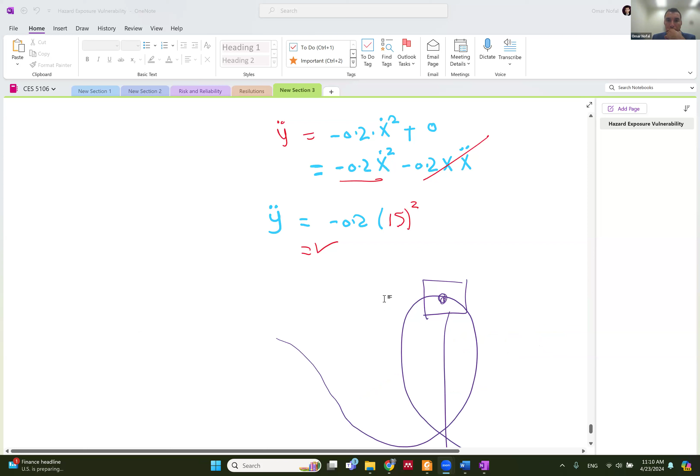Like, for example, if in the problem you are given a body that is moving from here to here, and I give you that this body covered this distance s equal to 6 meters in time 5 seconds, find the velocity, find the acceleration, find all these, that means that's chapter 12. It's kinematics. It might be given in different ways.

I might give you the velocity it started with, and I don't give the distance, and I tell you that it stopped here. So I'm just playing with different problems, but it's the same concept. Look at the equation sheet. You will find the general rules. You will find the ones with constant acceleration and non-constant acceleration. You have to distinguish between these. You need to understand the problem, understand the givens, and substitute in the equations.

In a problem where, for example, I tell you a body is on a slope, and there is friction with mu k equal to something, and this body has a mass of 10 kilograms, so you have to convert it to weight, and it's attached, for example, to a spring or a force that is pulling this body. So once we start talking springs, forces, and I give you weights, that means we have to use Newtonian kinetics. So I have to draw a free body diagram and a kinetic diagram and substitute with the sum of the forces equal to ma.

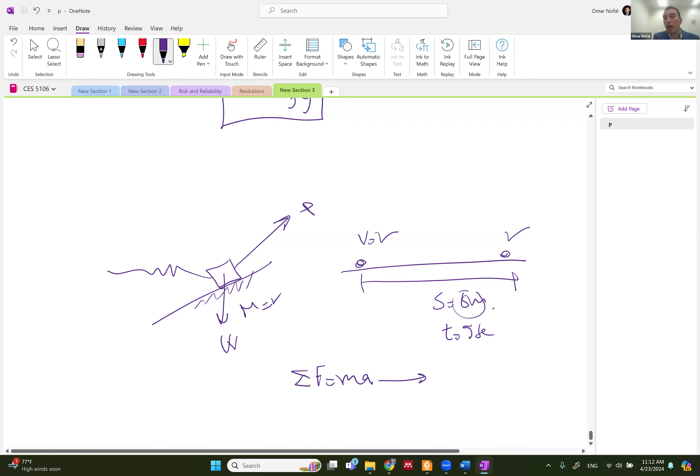This can be, for example, linear, so you will talk about x and y. It can be tangent and normal, so we will have to figure out the tangent and normal components. It can be r and theta, which is polar. That means the body is moving in a circle. So you will have to get sum Fx, sum Fy, or tangent and normal, r and theta, and you have all the rules for these. Like how to calculate a normal, which is v squared over rho. So you have to understand what is given in the problem.

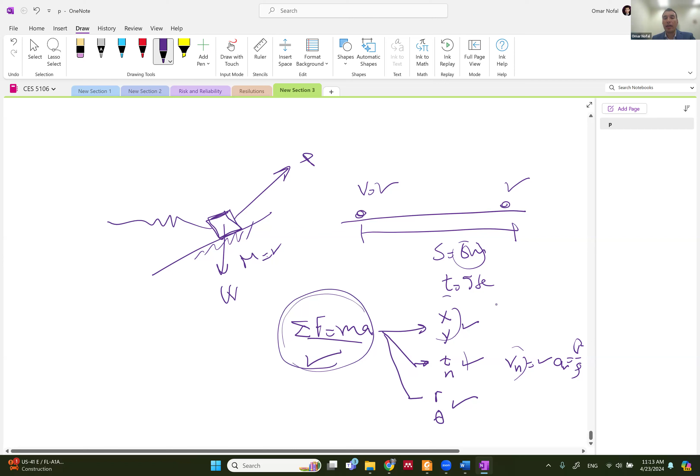Sometimes problems can be solved with chapter 13, the Newtonian kinetics, and also can be solved with work and energy in chapter 14. It's kind of the same thing. If we are solving a problem at a specific instant, like this instant, that means I can apply Newton's second law. Newton's second law is applied at a specific instant, not over time. But work and energy is about bodies that start at a specific position and end at the final position. So that's when I give you specific positions, like position 1 and position 2.

And then I give you, for example, the distance s that this body traveled, and a force acting on this body. So that means I have force over distance, so I need to use work and energy. Maybe I use conservation of energy. So you will have to understand which one to use. Sometimes I give you two positions, but I ask you to calculate something at one instant. I give you the other position just to calculate maybe the velocity here, or the acceleration of the body here, so you don't have to use work and energy, just apply Newton's second law at this position. Like the one I gave in the first midterm.

I gave you a curved circle like this, and a body moving here, and it came here, but I don't want anything from this position. All I wanted was this position. In this position, you draw a free body diagram. The weight is going down, the normal force is going up. This is the free body diagram, and the kinetic diagram. You will have the a normal this way, the a tangent this way, and then you sum the forces in the tangent direction and sum the forces in the normal direction. Depends if there's friction here or something.

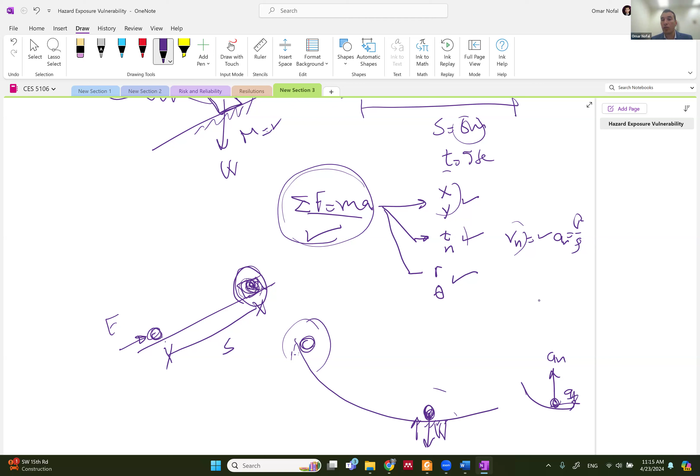So my advice, in any problem you will have to draw something. That's what I do in any engineering problem. Most of the problems in dynamics require you to draw a free body diagram and kinetic diagram because bodies are moving. So you will have, for example, a body moving on a slope like this. You will have to put all the forces in the free body diagram. For example, this body has an external force P pulling this way. If it has a spring like this, you will have to put the spring force Fs.

You will have to put it if there is a friction. So if this is the free body diagram, this is the kinetic diagram. If there is a friction, and I assume that this body is going up, so this is MAX and this is MAY. So if the body is moving up, and this is my assumption, I have to assume the F of friction is going this way, and I have to assume the normal is going up.

I put all the forces in the free body diagram and all the movement, the acceleration, AX and AY, in the kinetic diagram. And then all I have to do: sum of the forces in the X direction is equal to MAX, sum of the forces in the Y direction equal to MAY. So I have a bunch of forces in the X direction. I have F of friction.

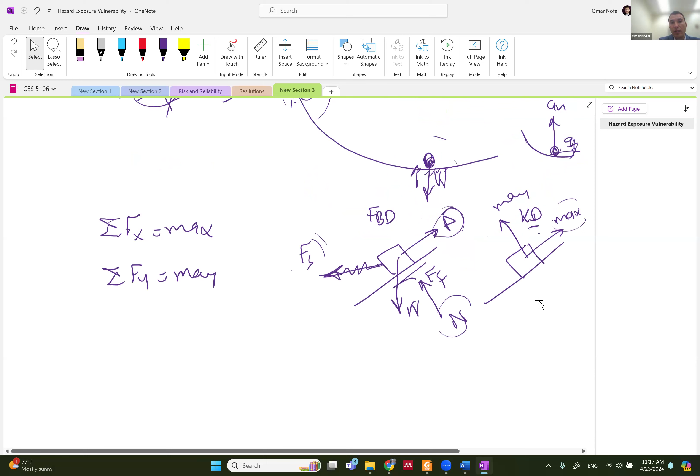So yeah, Newton's second law is applied at the specific instant, either at the initial position or at the final position. However, work and energy works between two different positions. Like this one, it's only one position. I can apply Newton's second law at this position or at this position or at both of them. But when I tell you a body started moving from this position and moved on a curve and came to this position.

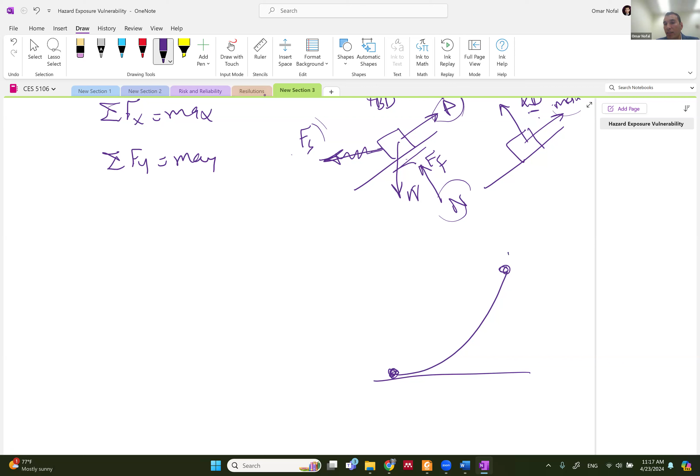So right now I give you some information to get the velocity V2 and V1, and I give you the information about the height here and the height here, H2 and H1, and there's a force applying on this body. So I have to know the path of this force, so I have to know the S on this curve. So right now you need to apply that the energy at position 1 is equal to the energy at position 2. And the energy means that the kinetic energy T1 plus V1 plus the work done by the external force from 1 to 2 is equal to T2 plus V2.

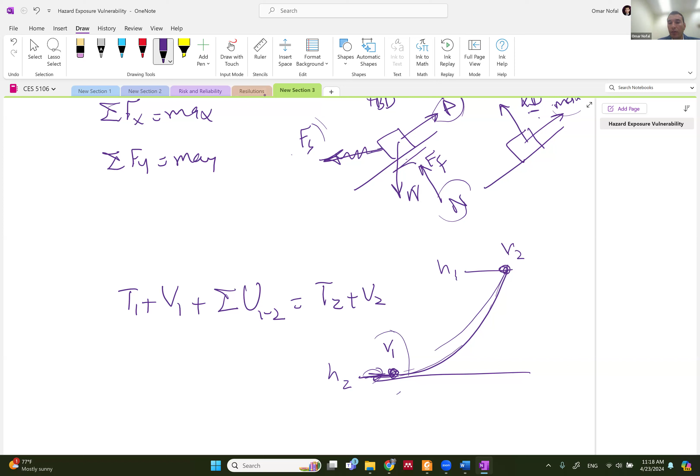So right now you have two positions, and I need to deal with these two positions. I need to know all the information about this position. So if I said that this is the datum, so this is H2 and this is H1. So H1 is equal to 0. So definitely V1, the potential energy, is equal to 0, unless there's a spring. So I'm gonna add the potential energy that comes from the spring. This has H2, so I have to do the potential energy.

If V1 has a value, and I'm telling you that I shoot, for example, a soccer ball, and the soccer ball went on a curve like this until it stopped here, so V2 is equal to 0. That means that the kinetic energy half mv2 squared is equal to 0. So you have to write all the rules because you will get points on the rules that you write. If it's a problem where you use the conservation of energy, you have to write this rule and then expand this rule.

So you know that the kinetic energy is half mv1 squared. I know that the potential energy has two components: one comes from a spring, one comes from the weight. So the weight is mgh1 and the spring is half ks1 squared, plus the work from 1 to 2. And this is equal to half mv2 squared plus mgh2 plus half ks2 squared. So I expanded this rule.

The next thing is to substitute. So if you have V1, you substitute V1 here. If H1 is 0, and that depends on where you decide the datum is. I decide the datum here. If you decide the datum up there, this is gonna be your datum, and any distance below the datum is gonna be negative. Any distance above the datum is gonna be positive. So I have mgh1; if there is no spring, these two are gonna be 0. I have H2, and V2 is equal to 0 because I said that the body's gonna stop here.

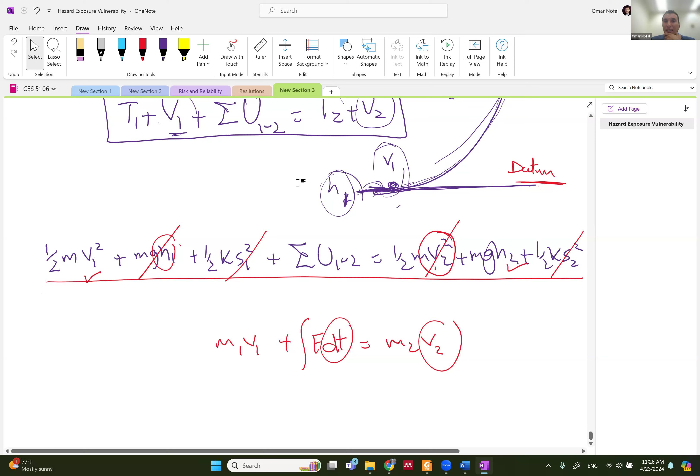And we don't need that because each problem is going to have like 20 to 25 minutes to solve, and you need to allocate your time in an efficient way so that you can tackle all the problems. So I believe that's my best strategy. To solve an exam, you need to read the problem very well, identify what approach you are going to use, and based on the approach, look at the equation sheet, see what equations you have and how you can use them to solve the problems.

Yep. So do any of you have any questions so far? Is this any helpful?

Sorry, Professor. I think someone in the chat asked if there's gonna be a pulley question, I guess related to rigid body motion or something similar. Well, it can be. You already got a quiz on this. You have to understand, actually pulley questions are easy, not that difficult. It's just a bunch of lengths that you have to calculate. So you need to understand how the system works.

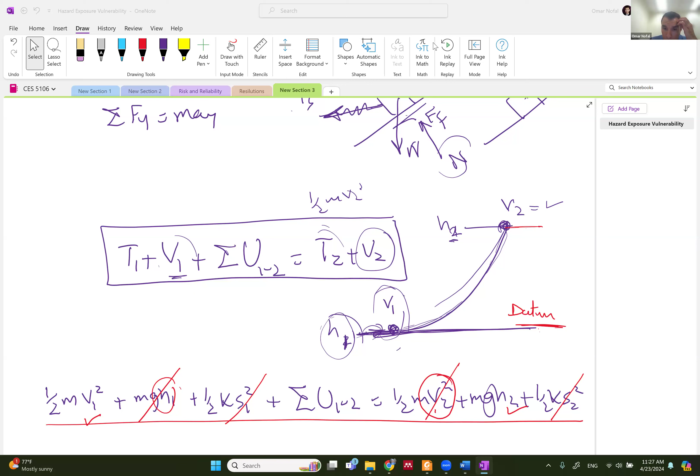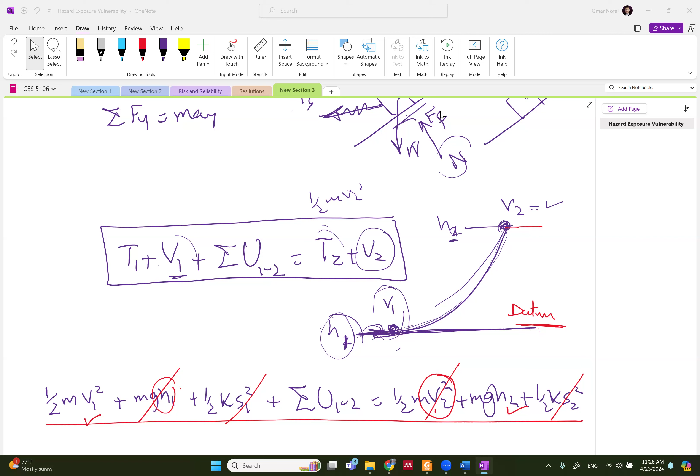Professor, I have a question. Do you have an example for the rigid body motion, the relative motion? Because that's the one that sometimes makes me confused, not with the omega, but when the omega has to do with a fixed point. Yeah, I got you. So basically when the velocity has to go one way or another, to get the right k, the right i and stuff like that.

Yeah, so let me look here for something. Forget my folder. Let me actually check if I have something that I can copy and paste here. Maybe a question from the homework.

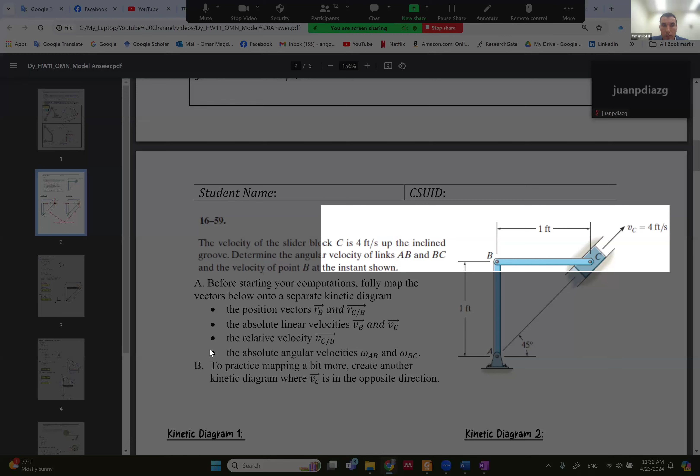Right, so let's pick this problem. All right. Okay, so let's see this problem. It says that you have this system, the velocity of the slider block C is 4 feet per second and it's going up. So it shows you the direction of VC. And here you want to distinguish between the absolute velocity and the relative velocity.

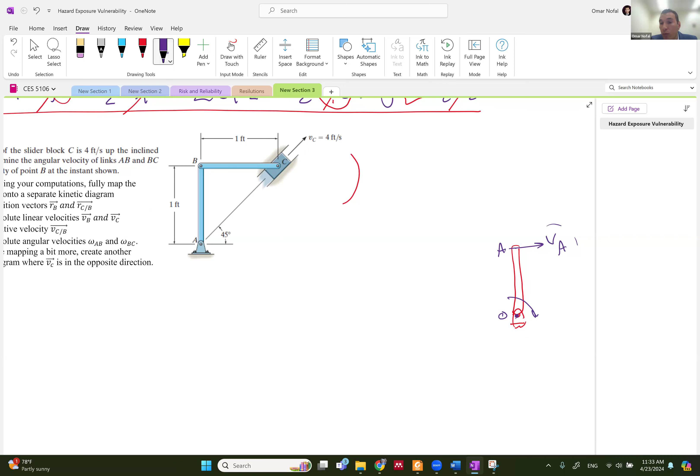So the absolute velocity, for example, let's write this here. If you have a bar like this, and this bar is attached to something here. This is the origin, O, and if this bar has omega this way, this is OA, this is VA, and this VA is with respect to a fixed location O, because O doesn't move. We said that VA is equal to VO plus VA with respect to O.

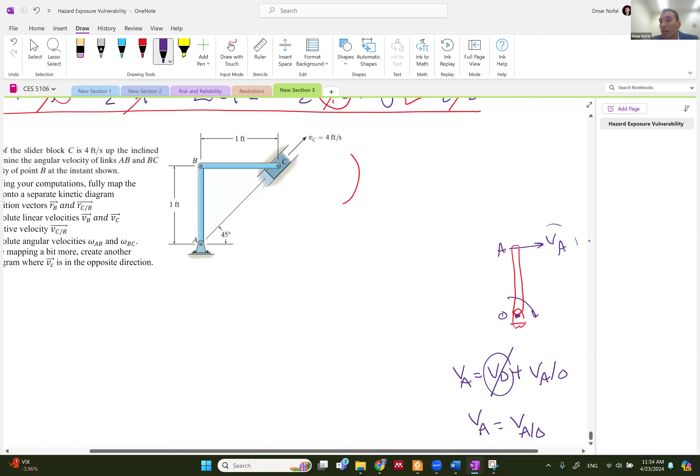So VA is equal to VA with respect to O. Why? Because VO is equal to 0. O is not moving. So that's not relative velocity. That's called absolute velocity because VA with respect to O is the same velocity as VA. Okay.

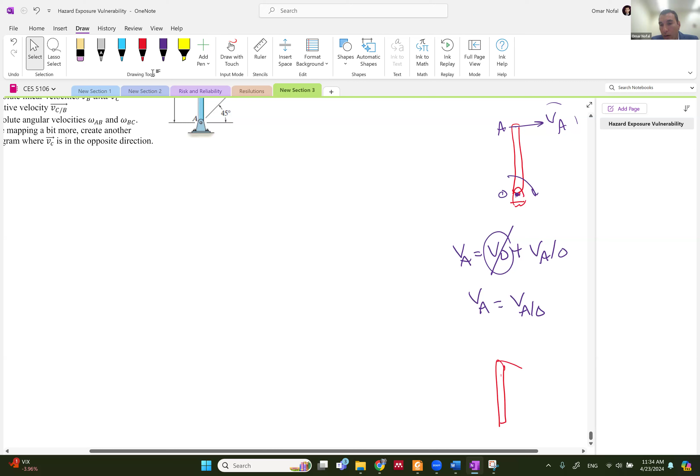But this is not the case if you have something like this, and then you have your bar like this, and this bar is attached to something like this. So this is fixed, and this is fixed. Let's say that this is A, B, C, D. Let's see what is absolute and what is relative. VD is equal to 0 because this is a fixed axis and VA is equal to 0.

If we want to get the absolute velocity, and I'm saying that this is moving with omega in this direction. By the way, you have to understand when omega is negative and when omega is positive. Omega is positive if it's counterclockwise and the thumb is towards me. But it's negative if it's inside your paper or inside your screen. So that's negative if it's clockwise.

So I have clockwise omega, which is negative, which is going to give me a VB in this direction. So this is VB, and this is absolute velocity. Same thing with VC. If this is moving this way, this is going to be moving this way. VC is going down. That's also absolute velocity. Both VB and VC are absolute velocities. Why? Because they are with respect to D, which is not a moving point and has a velocity equal to 0. So the absolute velocity is going to be equal to the relative velocity.

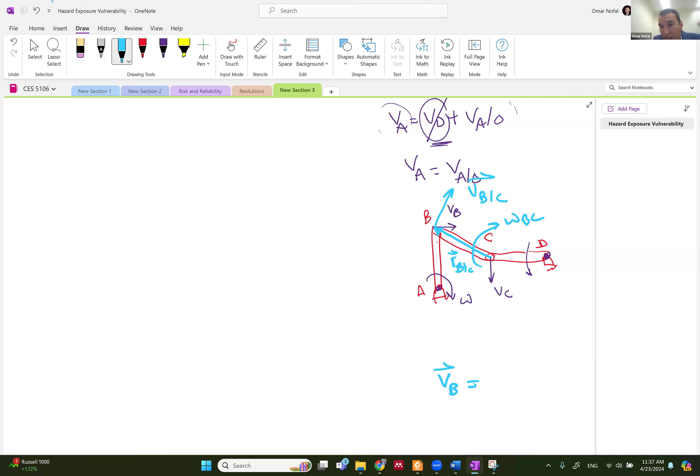If we want to find, for example, the VB vector, VB vector is equal to VC vector plus VB with respect to C. For example, in this problem I might give you this distance, this R, and I give you this omega. If you know this R and this omega, you can get the absolute velocity VC by multiplying R by omega.

If you have a bar like this, and I give you the omega of this bar, and I want this velocity, you multiply the R by omega. If you wanted the velocity here, you multiply this R by omega. The velocity keeps decreasing until you come here, and this is the point of zero velocity, which is the instantaneous center of zero velocity.

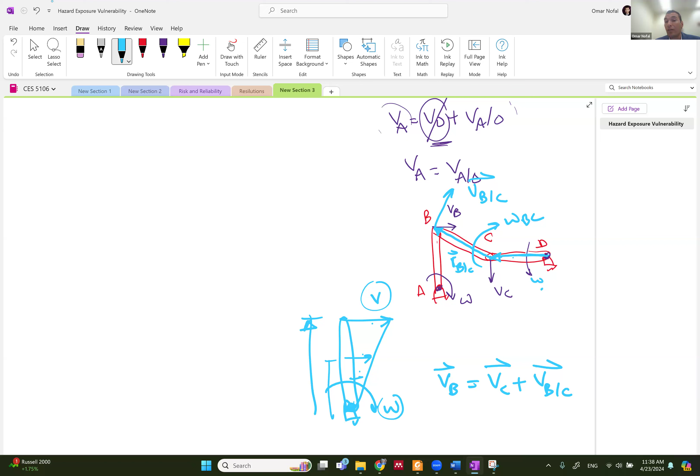So if I want to get VC, I get it from the omega here and R here. So I know this. Then I want to find what is VBC. VBC is going to be equal to the omega... which one comes first? I believe if you look at the equation sheet, it's going to be R BC cross product omega BC. Is that right?

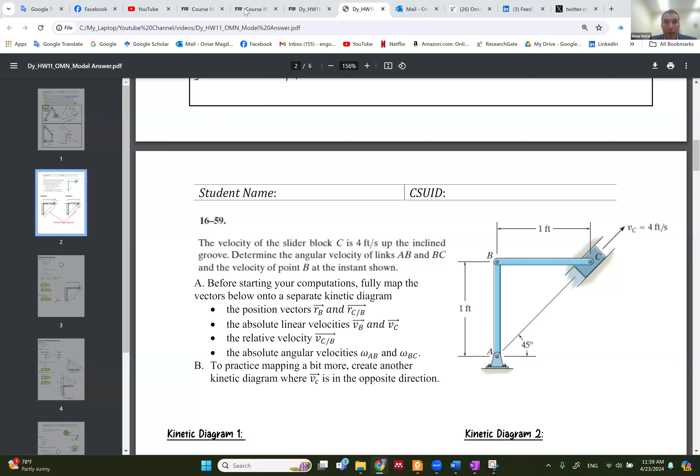If we go down, I believe I have it many ways. Okay, I have actually omega before R, and this is going to be a huge difference because it's going to give you a negative. So I have to have omega multiplied by the R vector. Let's swap these.

So you will have omega BC crossed by R BC. How can I get R BC? You're definitely going to be getting a distance like this and a distance like this. So you get R BC as I and J, and omega somehow, maybe it's unknown, maybe it's given, maybe you keep it as it is.

But let me tell you something. If you have a vector equation like VB equal to VC plus VB with respect to C, this equation has an I component and has a J component. So from this equation, you can get two equations.

You know the direction of VB. I know it's all in the I direction, so I know that VB has a magnitude VB in the I hat direction. And VC, I know that has a magnitude VC in the negative J hat direction. All goes down. All this information, that's basics.

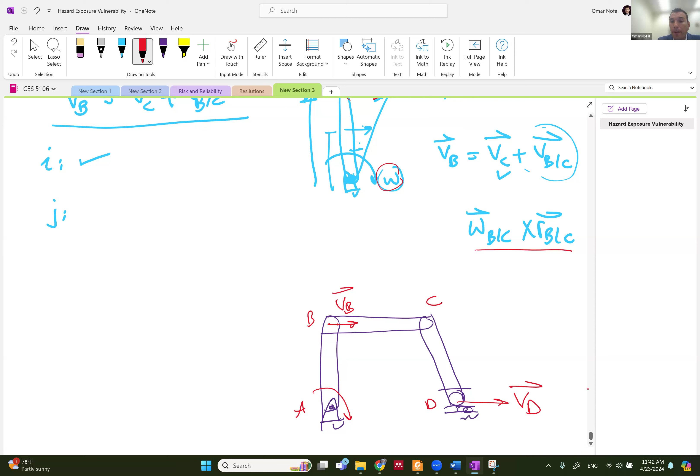If I want to find out, I believe the omega of this body goes this way, so VC as an absolute is going this way. But actually, this is VC with respect to D. This is not absolute, because before, VD up there was 0, so it was absolute. But right now it's VC with respect to D, because right now D is moving.

I cannot relate C to a moving point. We always relate to a fixed position. But if this position is not fixed, I have to relate to it. So this is VC with respect to D.

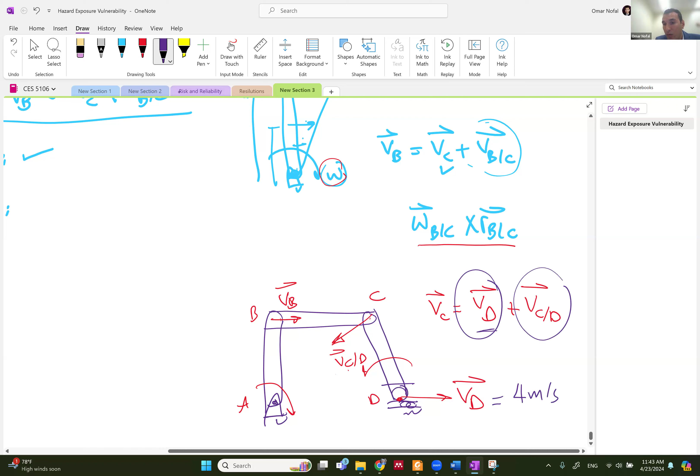Right now, VC is equal to VD plus VC with respect to D. If VD is equal to 0, like the problem from before, this is going to be 0. But right now, in the problem, maybe I give you VD equal to 4 meters per second, so right now you have to put it here. And VC with respect to D is going to be the omega of this body.

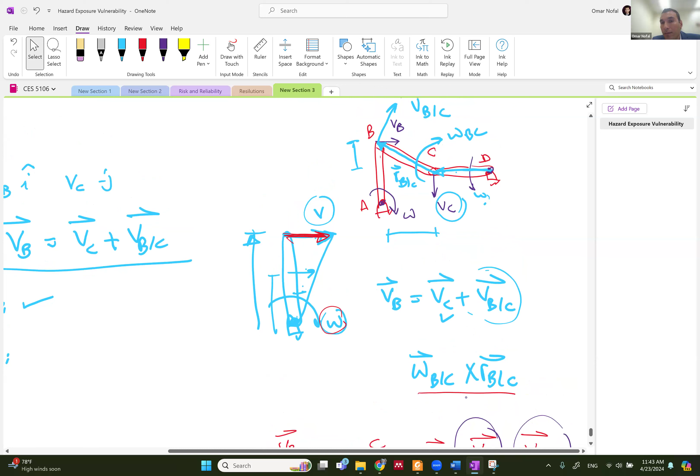We said that it was omega before, omega DC vector crossed by RDC vector. From before, it's the same thing: VC is equal to the omega of this R multiplied by this R distance, which we already have here, but VD was equal to 0. Right now, in this case, VD is not equal to 0. That's what you need to keep attention to.

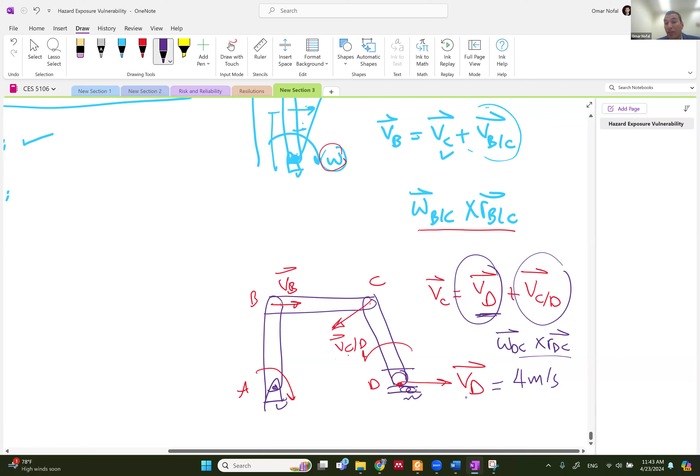Like any example you will be given, you will have to look at the boundary condition. This point is fixed, so it's not going to move, so VA is equal to 0, so VB is absolute. But C, in the other problem, with respect to the fixed position D — right now D is not fixed, so I cannot say that VC is equal to VC with respect to D. Why? Because D is moving. So I have to add the other component, which is VD, right? That's something you need to take care of.

Let's get back to the problem. I just tried to explain what we have. Let me actually paste it one more time here. Control V.

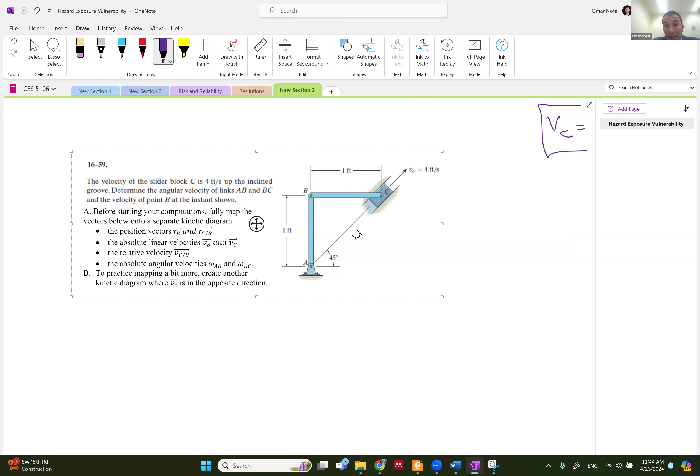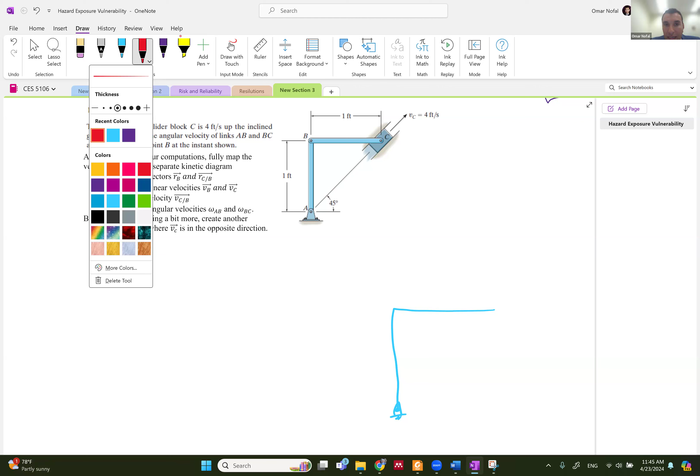So if I'm gonna draw this problem again, I'm gonna make it like this, and this is not moving, and I have VC at angle 45 degrees. So I have VC this way, and I know it. VB, if I wanted the absolute VB, and I know the omega, okay, I don't have omegas here.

The velocity of the slider block is 4 feet per second up, inclined, determine the angular velocity. Okay, the angular velocities are not known for AB and BC. The velocity of point B at the instant is shown.

Oh, and the velocity of point B. So it needs the velocity at point B. Before starting your computation, fully map the vectors below onto a separate kinetic diagram.

So right now I'm asking you to map the position vectors RB and RC with respect to B. If I want to do them, let's do them. I have RB. RB is something like this. So this is RB, the absolute distance, because it's respect to A, or a point that is not moving.

RC with respect to B. If I want to do RC with respect to B, it's going to be something like this. RC with respect to B. So that's how it looks like.

The absolute linear velocities. If I wanted the absolute linear velocities, VB and VC. Actually, VC is already mapped. This is the absolute velocity. VB, the absolute linear velocity.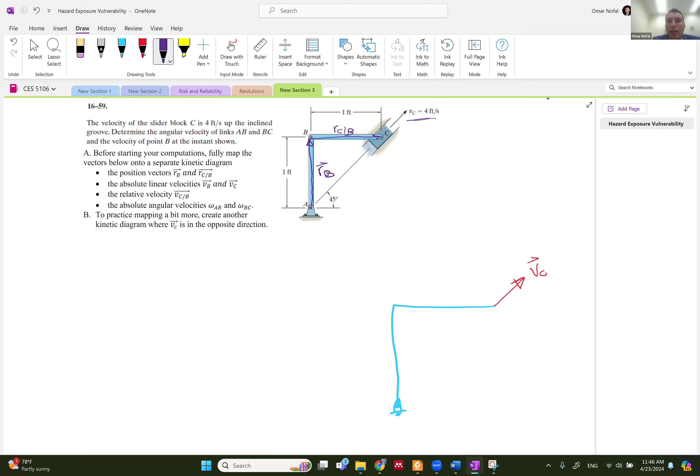Okay, let me ask you, if I wanted the absolute linear velocity, should I relate it to A or relate it to C? Can somebody answer this, so I don't feel that I'm talking to myself. You should relate it to A, because it's the fixed one, and VA is gonna be zero. Exactly. Okay, continue with me.

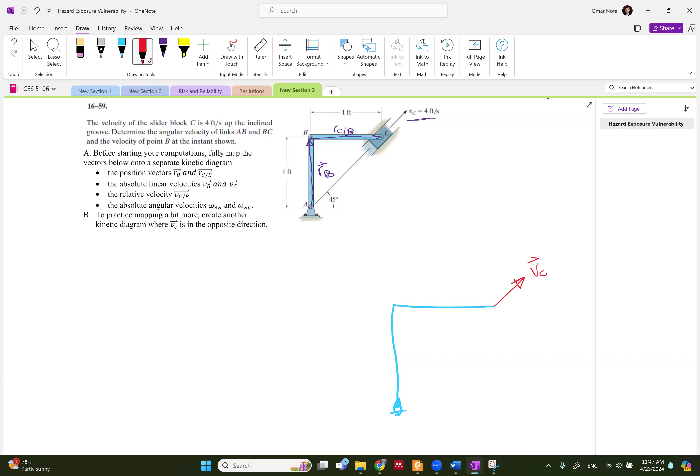So if C is moving up, what is the direction of omega AB? Is it gonna be clockwise or counterclockwise? It should be clockwise, this way, omega AB. How about BC, is it gonna be clockwise or counterclockwise? This part, counterclockwise, omega BC.

So I map the omegas, okay. So I know right now if I wanna find out VB with respect to A, I'm gonna look at the direction of omega AB, so definitely VB is gonna go this way. So right now I mapped VB, and VC is already mapped.

So the next thing, the relative velocity VC with respect to B. All right, VC with respect to B. So if this is my arm, actually I have to make it perpendicular. So this is VC with respect to B. You will tell me, but there is no way that VC is gonna go up because it's restrained to move in 45 degrees.

That's right, but this is actually how VC with respect to B looks like, because we are not looking at absolute velocity, we are looking at the relative velocity. At some point when this arm goes up, it's gonna be something like this, like let's assume that this moved this way. This is the starting point, and C is moving this way, and actually no, it's not gonna be this one. This one is gonna be something like this, because once this goes up, this arm is gonna return this way. So right now this is absolute velocity, but this is the relative velocity to this point because it's always perpendicular. Okay, so right now we mapped VC with respect to B.

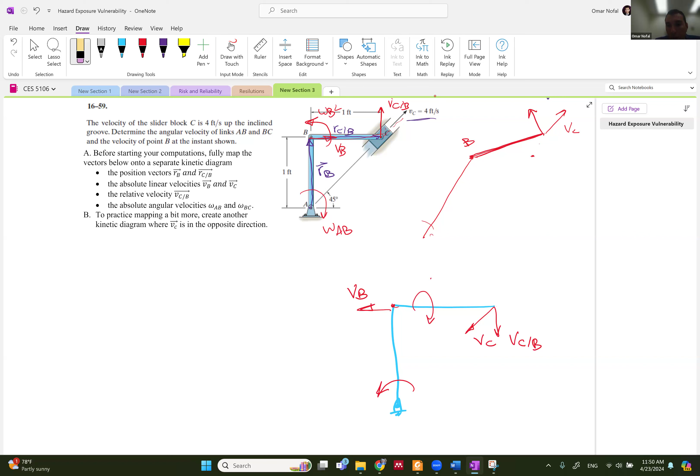The relative velocity VC with respect to B, okay, I have BC and it's R moving this way. So this is going to be going down. VC with respect to B is going to go down. Why? Because the omega is going down this way. This is omega BC and this is omega AB.

All right, so we did the mapping in the opposite direction. If we want to solve this problem, can you imagine you're only given one input, which is the velocity at C, and you are asked to get the two omegas and get everything in this problem? I believe the key for this problem is VB. Once you build the equation, VB is going to solve the entire problem. But let's find out where the instantaneous center of velocity for BC is first.

Okay, so right now, this one, something like this, moving up. Let me actually write it as a velocity.

All right, so I have the absolute velocity VC going up, and I have VB, it's this way. All right, and I have this is the omega AB, and this one is going to be the omega BC.

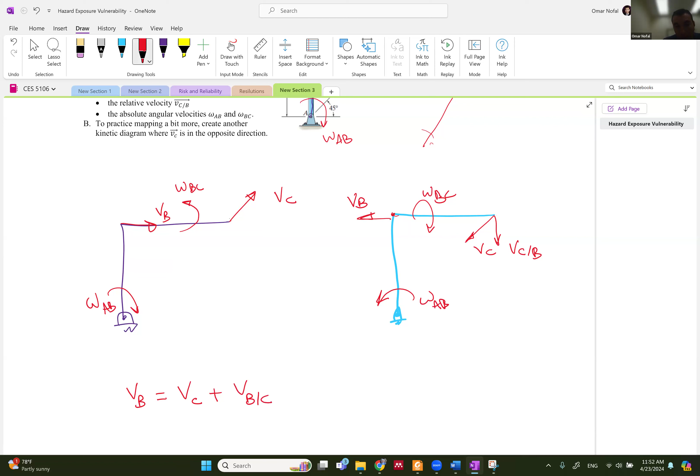If I'm going to write the equation: VB is going to be equal to VC plus the VB with respect to C. All these are vectors, so I write only one equation, and I expand this equation. I know that VB is in the I direction, so I put VB in the I hat direction.

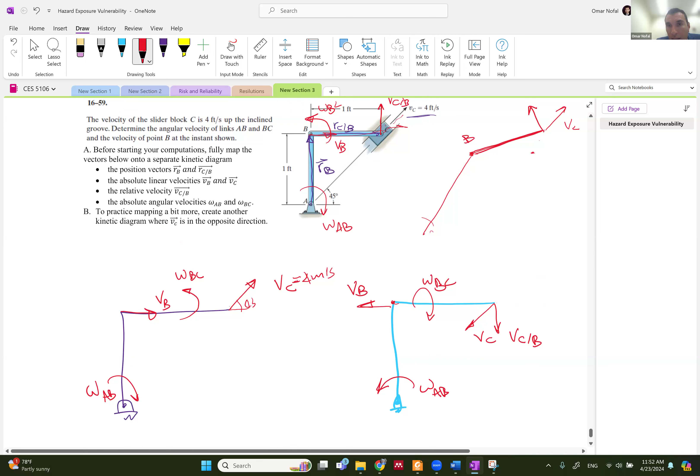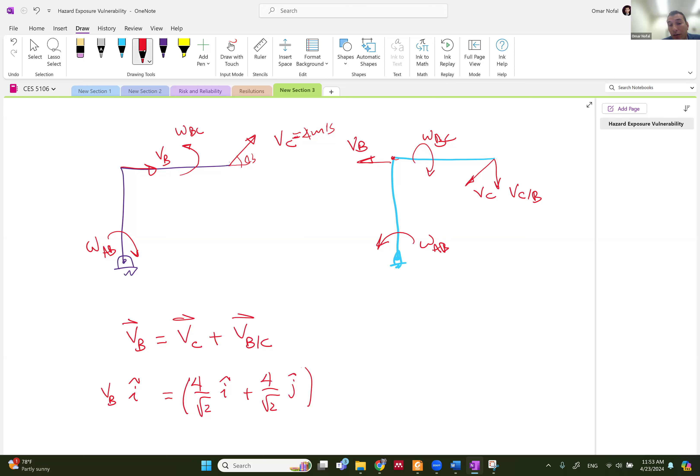VC, I know where the direction of VC is. The magnitude is 4 meters per second, but I know the angle here is 45 degrees, that's what's given in the problem. If I go up, this is 45 degrees here, so I know the component in the X and the component in the Y. So VC is going to have 4 over root 2 in the I hat direction plus 4 over root 2 in the J hat direction, or 4 cosine 45 plus 4 sine 45 in the J hat direction. So I know where the direction here is.

VBC is omega BC. Just double check, it's the omegas, yeah, because that's going to make a difference. Omega BC - see, some people have questions here. Some people ask about 4 bars, okay, we'll see about that. Omega BC cross R.

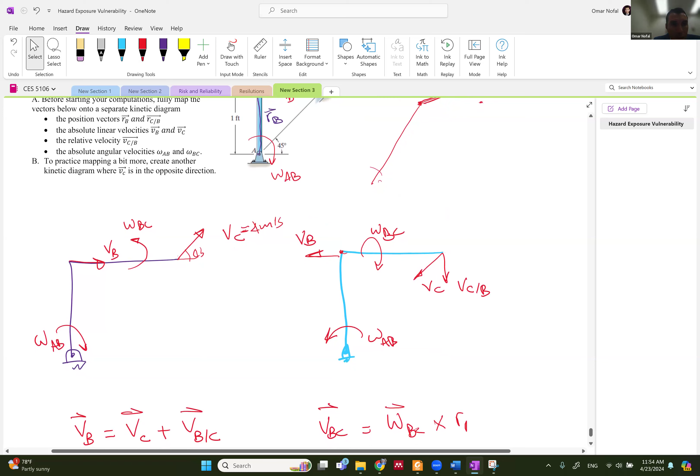What we need is VB. Let me see what I asked here. Okay, a relative velocity VC with respect to B. All right, so I have RB with respect to C. Actually, you can do the same thing: you can do this as VC is equal to VB plus VC with respect to B. You can do the same, it's just going to have some change in the directions.

All right, I have these. Actually, I know RB with respect to C. I have this is point B and this is R. This is point B and this is point C, and I know that this, I go RB with respect to C, so this is RB with respect to C. It's going in the negative I hat direction, and the value is 1 foot. So I know that this is negative 1 in the I hat direction.

Sorry, this is omega BC that we need to put here. Omega BC, which I don't know, but actually I know the direction of omega BC. How can you tell the direction? How can you tell if it's going to be positive or negative, for the omegas or the R?

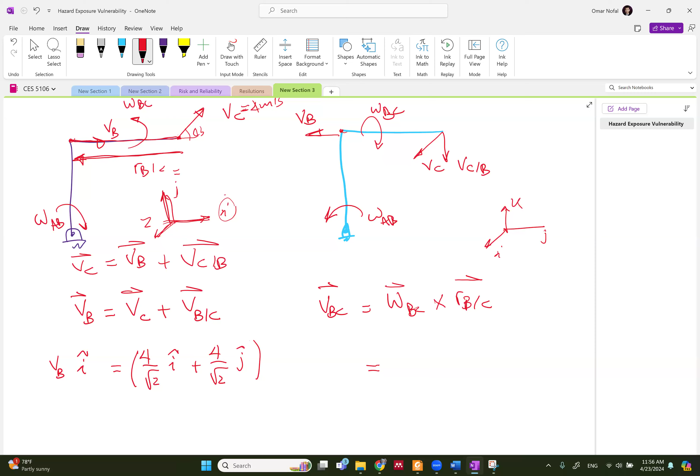And wouldn't that be positive I? Okay, so if I have point B here and point C here, if I want to find B with respect to C, so this is RB with respect to C. We start with B and end with B with respect to, we start from C because we want to find out where's the location of B with respect to C.

But if the opposite, I want to find out where is C with respect to B. So this is RC with respect to B. Okay, thank you. Right? Okay, so yeah, we have it here, RB with respect to C. I know the magnitude is 1 feet and it's in the negative I hat direction. So if you want to put them, I can put here -1 in the I hat direction.

How about omega BC? Actually, we said that if C is going up and this is rotating this way, so this is gonna rotate this way. So that means that omega is counterclockwise and my finger is gonna go towards me. If it's counterclockwise, it's gonna give me positive K hat direction. So let's say it's gonna be omega BC in the positive K hat direction. Once we multiply, it's gonna give us negative omega BC actually. But let's see what direction.

If you want to know the direction, you put I, J, K. If you multiply I cross J, it's going to give you positive K. K cross I is going to give you positive J. J cross K is going to give you positive I. Right now I have K multiplied by I. K multiplied by I is going to give you positive J. But we already have negative outside. So we are going to take the negative out. And this is going to be omega BC multiplied by 1, and it's going to be in the J hat direction.

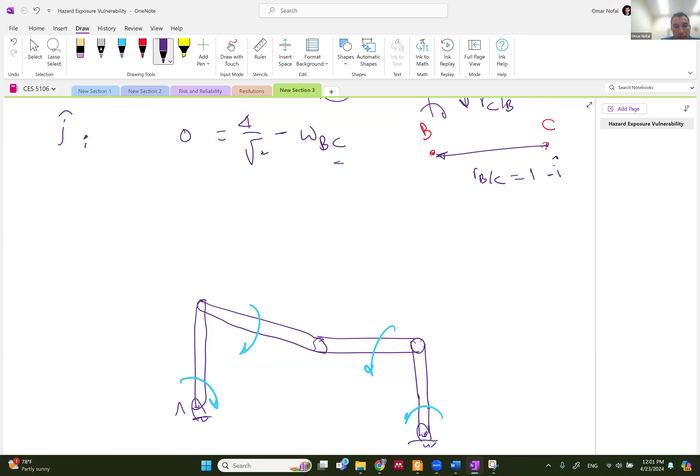If I told you that this is moving this way, so the omega of this body is gonna move this way, and the omega of this body is gonna move this way, and this is gonna move this way because this whole structure is gonna fold down. Okay. All right. If we want to map the velocities, let's say that this is A, B, C, D, E.

So VB is gonna be this way. VD is gonna be this way. VC can be calculated from the right side. So if you want VC with respect to D, it's gonna be something VC with respect to D. But if you want to calculate it from the B side, it's gonna be something VC with respect to B. It's gonna be something like this.

All right. So usually the absolute velocities are related to the instantaneous center of zero velocity. So right now, this point is fixed, so this is an instantaneous center of zero velocity. This point is fixed, so this is an instantaneous center of zero velocity. And the good thing about the instantaneous center of zero velocity is that it has a velocity equal to 0, so VB with respect to A is the same as VB. So directly, VB is going to be equal to omega AB multiplied by RB with respect to A.

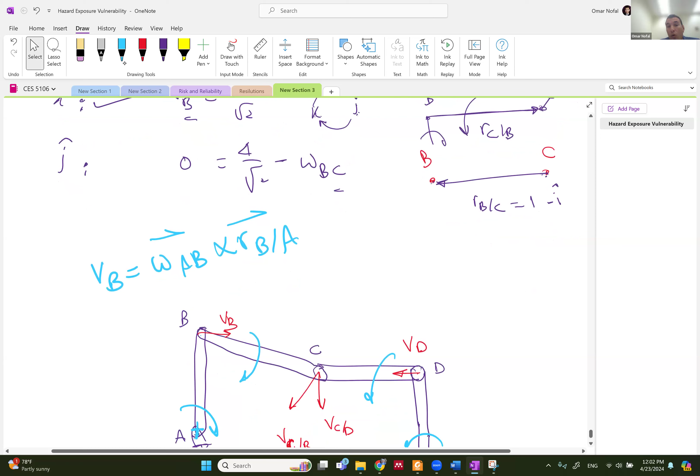But actually, let's put the R first so that actually, no, the omega is first. I always get confused with that. All right. So I always put it this way. Why is this simple? Because I don't have to put VA before. But if A is moving, this is going to be different.

If A is moving, I'm going to say that VB is going to equal VA plus the omega AB crossed by RB with respect to A. If A is not moving, VA is going to be 0, and I always have this equation. Okay, I hope that you guys understand this.

But for this problem, I'm going to give you only one variable. Maybe I give you the omega of this line, for example, this omega. If this omega is known and I give you this R distance, you can get VB. And once you get VB, it's going to be easy for you to get VC because VC is equal to VB plus the omega multiplied by this R, and then you can calculate the VC.

And then you start from here and go all the way down until you come here. How can I do this? By substituting in this equation. I give you this omega, you already have the R, you can get VB. Once you know this, you use this R to get the velocity at C.

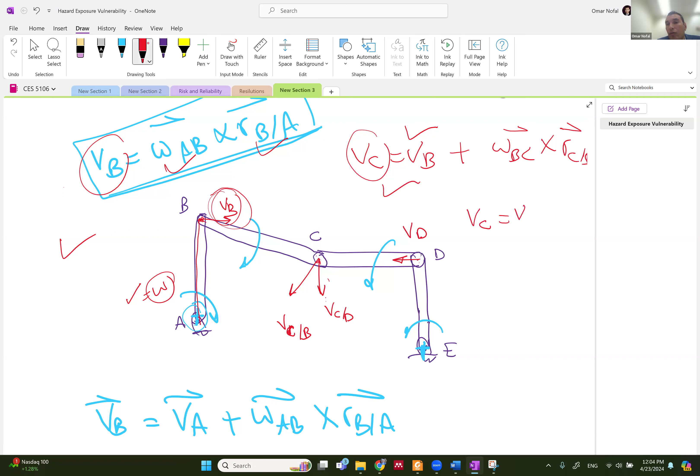So you will say that the velocity VC is equal to VB, which is already calculated, plus the omega BC crossed by RC with respect to B. Solving this equation gets you VC, the absolute velocity at C. Here you have VC is equal to VB plus VC with respect to B.

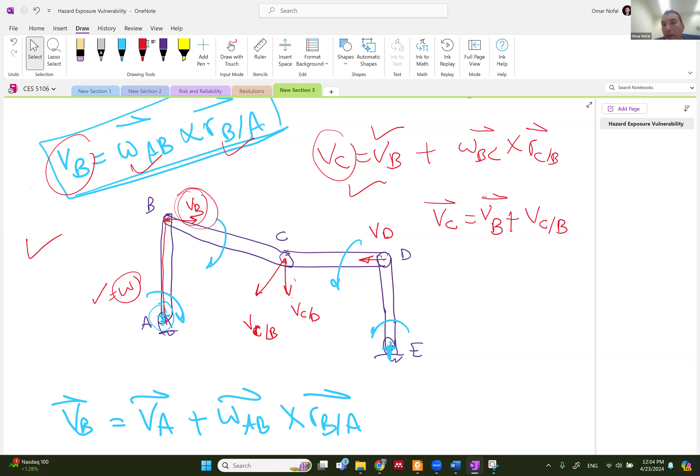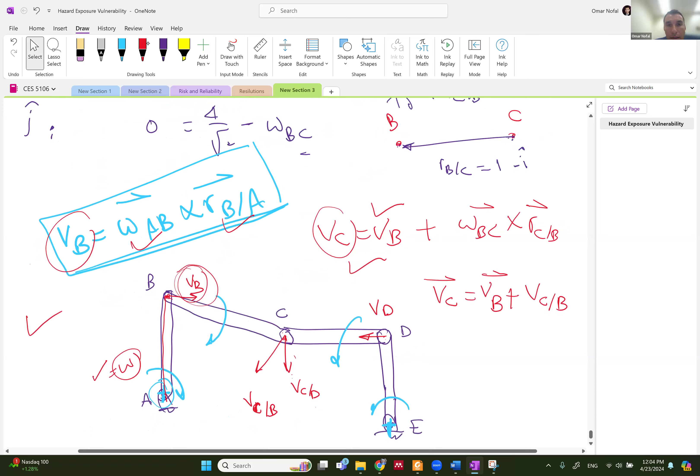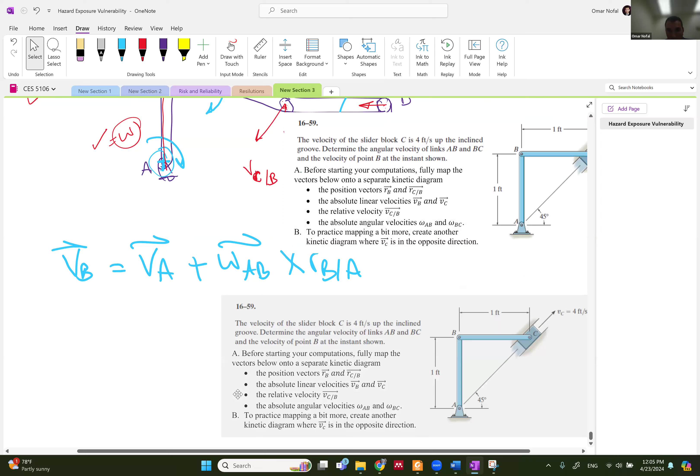Okay, so right now we mapped the VC with respect to B, but how can we map the absolute velocity at C? Let's do it. For this one, actually, it's much easier. Right. So right now, we know that

Do you guys remember how to get the instantaneous center of zero velocity for any body? I need to get, for example, the absolute velocity here. This is VB, and this is VC. Once I know the direction of two velocities, we draw perpendiculars. I draw a perpendicular here. Let's say it's moving up, so this is the direction of the omega. This is the instantaneous center of zero velocity of these two bodies.

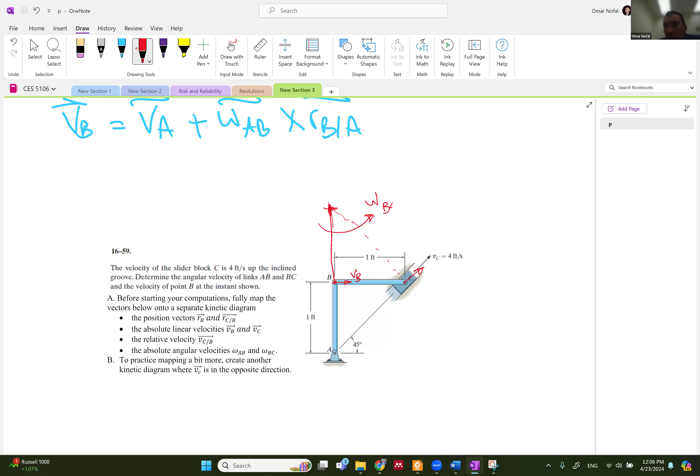So if you want to calculate VB, you multiply omega AB by this R. This is another solution for the problem, and I believe I did it in the notes, so you can look at that. Try to identify where the instantaneous center of each bar is. This one was easy. Why? Because A was fixed. So I know that this is the instantaneous center of this one.

So right now I know VC is equal to 4 feet per second, and this is 1 foot and this angle is 45 degrees, so this angle also is 45 degrees. This is 1 foot, and this is going to be root 2 from the Pythagorean theorem. So I already know the arm. If I want to find omega BC, let's say this point is I, omega BC multiplied by RC with respect to I is going to be equal to VC.

I know VC is already 4 feet per second. I know RC with respect to I is root 2. So omega BC is VC, 4 feet per second, divided by RC, which is root 2. So it's going to be 4 over root 2. And that's actually the same solution that we got before.

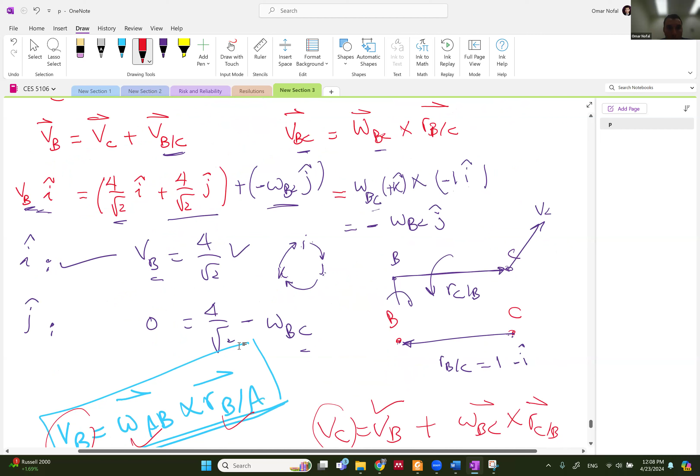If you go up a little bit, here we go. It's freezing. Okay. Yeah, if we go up a little bit, here, do you guys remember? The omega BC is 4 over root 2. That was actually a much simpler solution to this problem.

So I try to find out where the instantaneous center of zero velocity of this bar is. I know this direction and I know this direction; this is where these points are moving. So I make perpendiculars to these two, and this is how I get the instantaneous center of zero velocity. If you revise the notes, you will find there are many ways to identify the location of the instantaneous center of zero velocity.

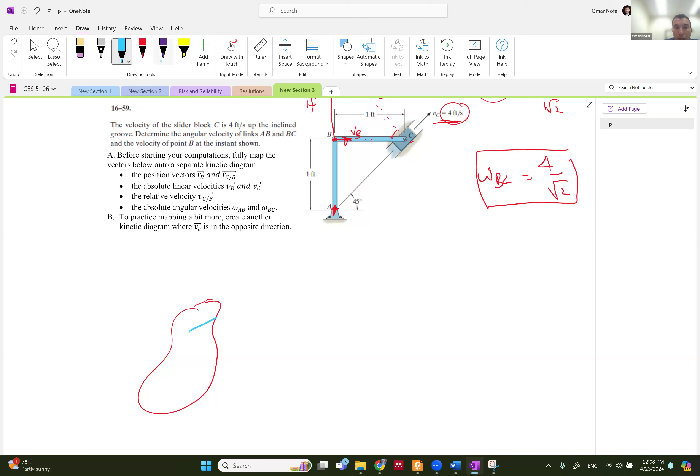So if you know 2 points, like for example, I know the velocity of 2 points on this body, or the direction of these two velocities, I make a perpendicular to this velocity, and this is the instantaneous center of zero velocity. I know this body is moving this way.

And if I want to know the omega of this body, if I know the VB and I know this R, the omega is going to equal V over R. Why? Because V is equal to omega crossed by R vector. I can do this for any problem. Same thing with the 3-bar linkages.

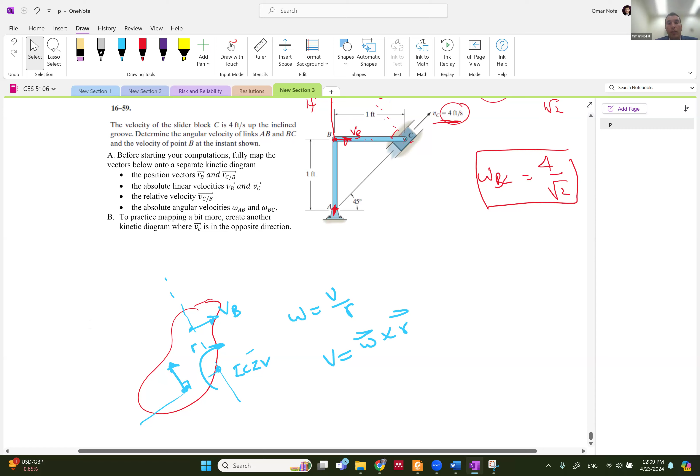It's just freezing. Just give it a moment. Okay, yeah, so do you guys understand this? Does anybody have any specific questions on this?

All right, so if I have 3 bars, something like this, and this is fixed here, and this is fixed here. I think it becomes heavy. All right, so I know that this is an instantaneous center of zero velocity. And this is an instantaneous center of zero velocity for this bar. And if I'm saying this is moving this way, this is gonna be the direction.

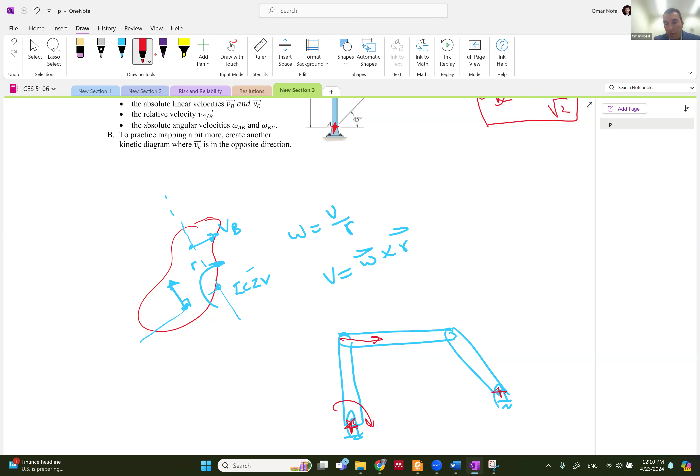And actually this is gonna move this way. So VC is gonna be this way. I know these two bars, AB and DC, but this bar BC has a general plane motion. I can't know where's the instantaneous center of zero velocity, but I can draw a perpendicular to this bar and perpendicular to this velocity, and the instantaneous center of zero velocity of this bar is gonna be here.

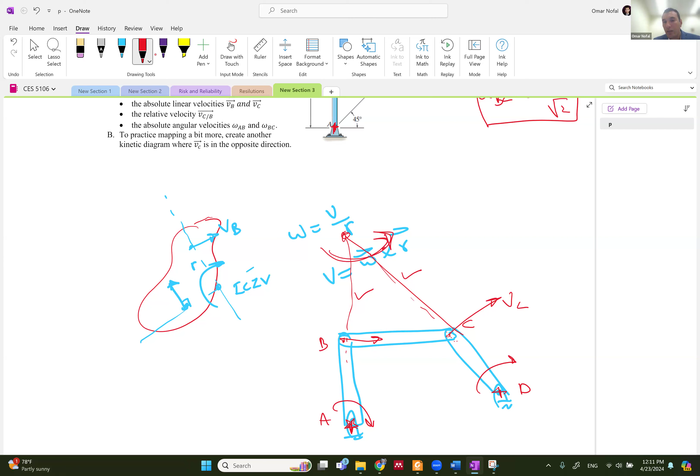And I don't have to multiply any vectors. Once I did some geometry and I identified these R's, knowing the velocity at C or the velocity at B is gonna allow me to get the omega for this bar. Same thing with, let's draw this 4-bar again.

If you have something like this, and let's say it's 4 bars, and these 4 bars are fixed here, and I told you that this bar is moving this way. So definitely this bar is moving this way, and this bar is moving this way, and this bar is moving this way. So this velocity is like this, and this velocity is like this.

In this one, if I'm looking at this part from the right side, here's the direction of the velocity of this point with respect to this point. And if I'm looking at this part from this way, this is the velocity. All these are absolute velocities. Not absolute, these are actually relative velocities. Okay, so here,

we will have to know if this body is moving, where this point is moving, so that we can identify it. Right now we cannot know the absolute velocity of this point. So right now we have to solve it with the relative velocities for this one, because I know the absolute velocity of this one, but this one we can't. For example, I can tell you this point is moving in a specific direction.

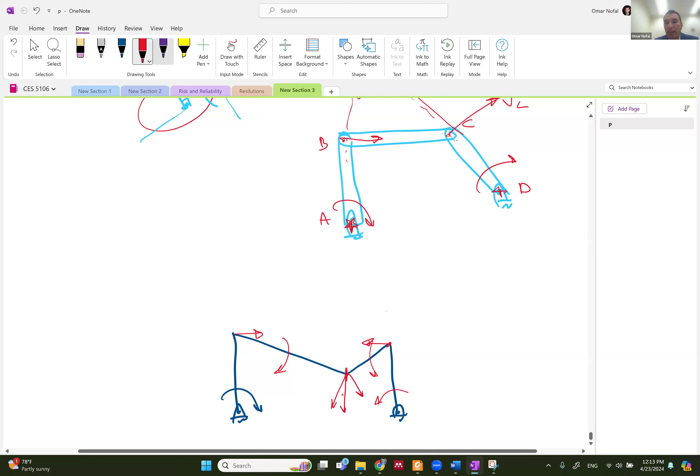If I restrain it for you, all right. Like if I told you that this point is moving this way down, you'll have to draw a perpendicular to this velocity and a perpendicular to this velocity, and you identify the instantaneous center of zero velocity.

Another practical example: I give you something like this and something like this, and here something like this, and I told you this point is moving this way. Right now I'm restraining this to move this way, okay? And this one is moving this way. So right now you'll have to find this by the relative velocity, this with respect to that. You cannot do it with the instantaneous center of zero velocity.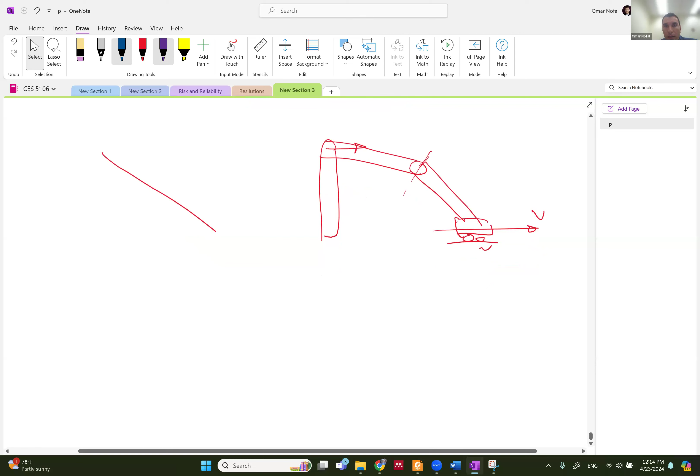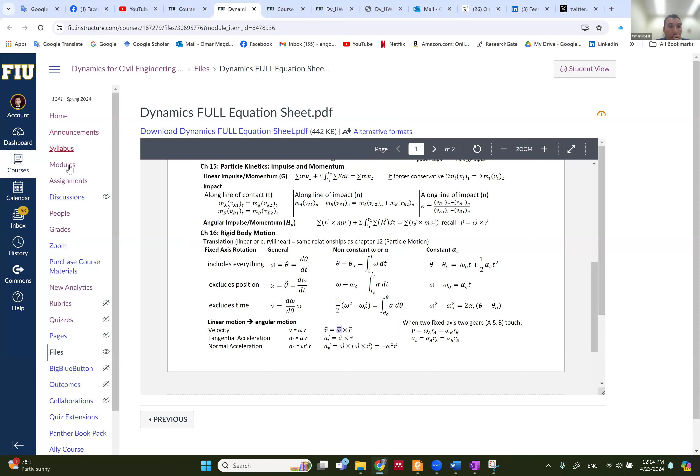For the instantaneous center of zero velocity, you have to have a member where you know the absolute velocities at the start and the end points. And let me tell you an application of this, and let me look at the notes because I believe I have it somewhere in the notes. Yes. Instantaneous center of zero velocity.

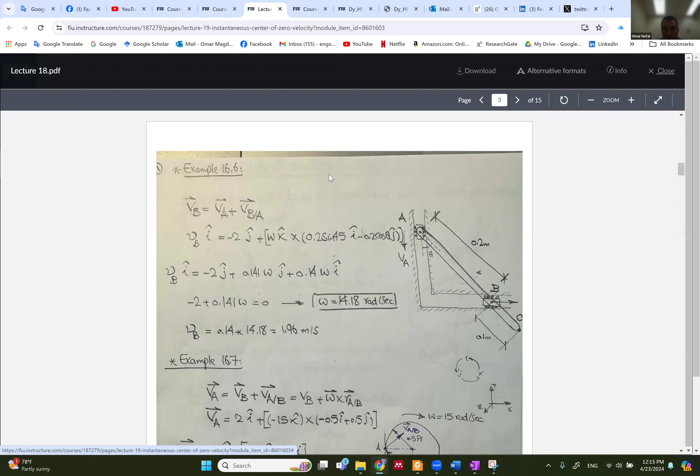Yeah, this one. Take this one.

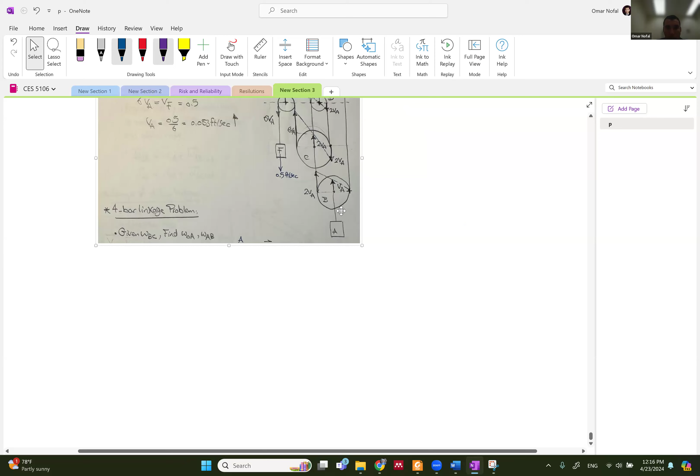Look at this example. This is a direct application of the instantaneous center of zero velocity. There are some applications that have an instantaneous center of zero velocity, like when you're driving your car or your bicycle, it's moving on the ground, and the ground is not moving. So we consider this instant an instantaneous center of zero velocity. And we say that this is moving about this point, because this point is moving this way, it's free.

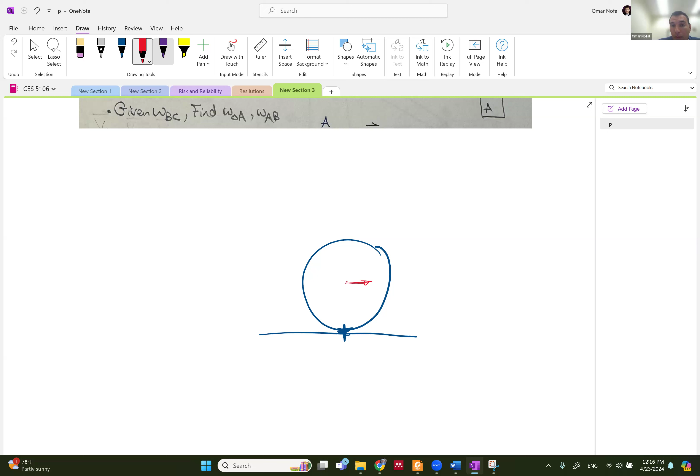Okay, how? Because this wheel is moving with an omega about this point, and if you wanted to find the velocity at any point on the wheel, you will have to multiply the omega by r, and r is measured from the instantaneous center of velocity here. So this is v. And v is linearly increasing as you go away from the ICZV, the instantaneous center of velocity. So if this is v, this is going to be half v. And here is going to be something like this.

It's like this at any one of these points. You multiply the omega by the r with respect to the instantaneous center of velocity. Same thing with pulleys. For pulleys, you have something like this. This is the cord, and you have your pulley here. So this is an instantaneous center of velocity.

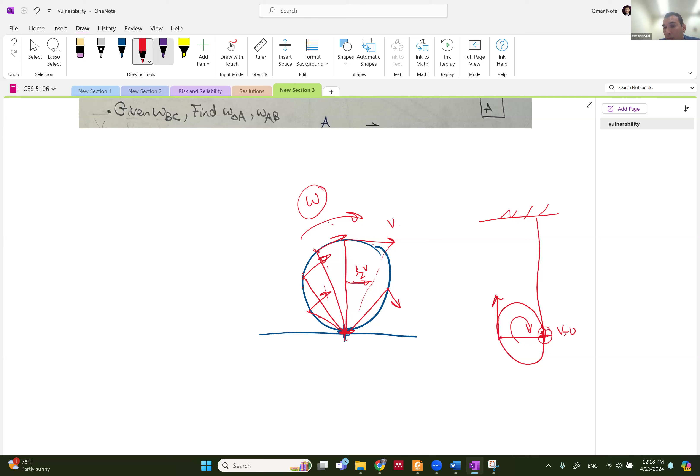And if you know the velocity here, which is 0, and you know the omega, how this pulley is rotating, then you can know what the velocity is at this point. If it's rotating this way, it's going to be something this way. And this is a direct application here. All right.

Okay, so look at this problem. I give you a system of pulleys, and I told you only one piece of information: point F is moving with 0.5 feet per second. So you will tell me, where can I find the instantaneous center of zero velocity? Okay, I have two cords here, one this way until here. This is one, and the second one is here, going all the way until it comes here. These two. Okay, let's delete them.

All right, so I know this is fixed from the top here and goes all the way down. So this is an instantaneous center of zero velocity. So I know that the velocity at this point instantly is equal to 0. And I know what I'm asking for: the velocity VA. I want to know whether VA is going up or down and how much. But definitely, if I know that F is moving down this way, all this cord is going to go up. So this pulley is going to go up, and VA is going to go up. So I know that VA is going up, but I don't know the value of VA.

But I know VA is a function of the distance from here. As I go away, the velocity on this pulley is going to be much more. So if this is VA, VA is going to be equal to the omega multiplied by R. If I know the omega of this pulley and I know this R, I can get it.

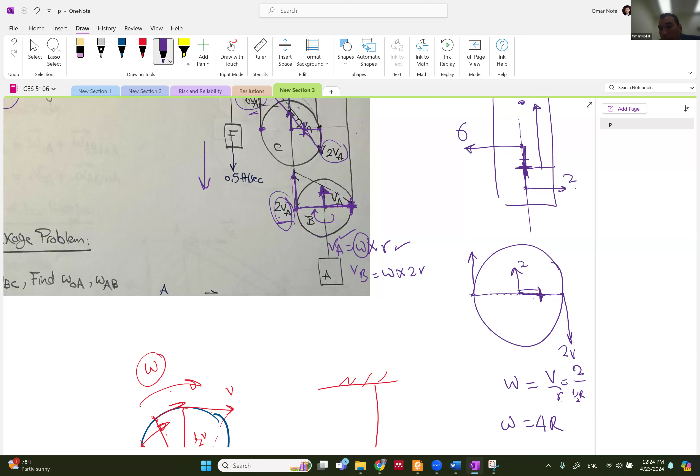So if I want to know omega, omega is going to be equal to V over R. R is not the radius, R is the distance between these two. So V is equal to 2 and R is half the radius. So right now I know that omega is equal to 4 over the radius. If you want to know the velocity here, V is going to be omega multiplied by the distance. The distance here is 1.5 the radius. So I have omega, 4 over the radius, multiplied by 3 over 2 the radius.

When you do this, it's gonna give you 6. So the velocity is 6 times; that's why I put here 6VA. How? I identified the center of the velocity. And actually, you can do some geometry. If this is 2VA and this is 2VA, the velocity is linear, because if you know the instantaneous center of zero velocity and this is V, in the middle it's going to be half V, at the quarter it's going to be 1/4 V, and it keeps going down until it becomes 0.

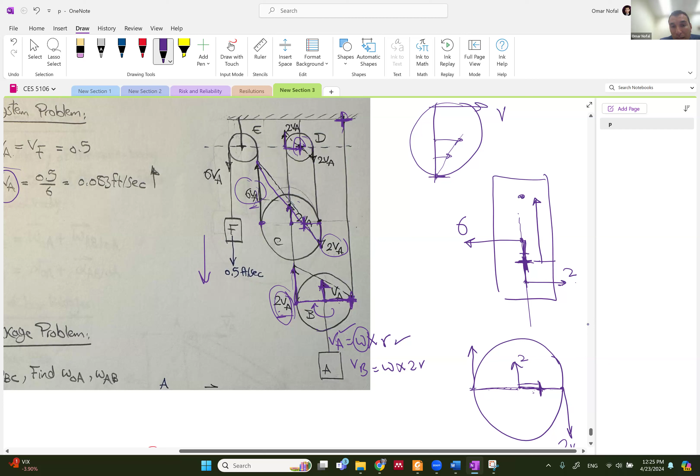So this is going to be 6VA. I go all the way up: 6VA here and 6VA here. So the velocity of the body F is equal to 6VA. If the velocity here is 1 meter per second, the velocity of F is going to be 6 meters per second. But in this case, I know the velocity at F is equal to 0.5 feet per second. So 6VA is equal to 0.5 feet per second, and VA is equal to 0.5/6.

I believe this is one of the most interesting applications on pulleys with the concept of an instantaneous center of zero velocity. You can solve the same problem using chapter 1, the relative motion: you get the length of the cord in terms of positions and you differentiate it to get the velocities.

You are going to sum this distance with this distance and try to find the datum. It's going to give you the same thing. But what we did here, we solved this by the concept of the instantaneous center of zero velocity.

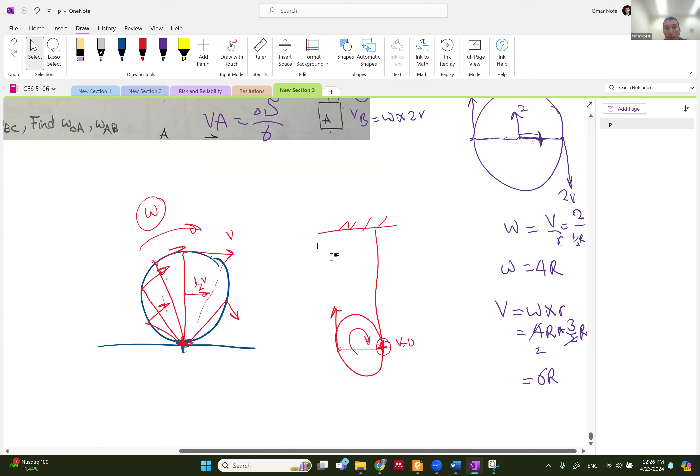One last comment on this problem. All you want to do is find the instantaneous center of zero velocity of all these pulleys. Just focus, you have this rope here, and at this point, the rope has zero movement.

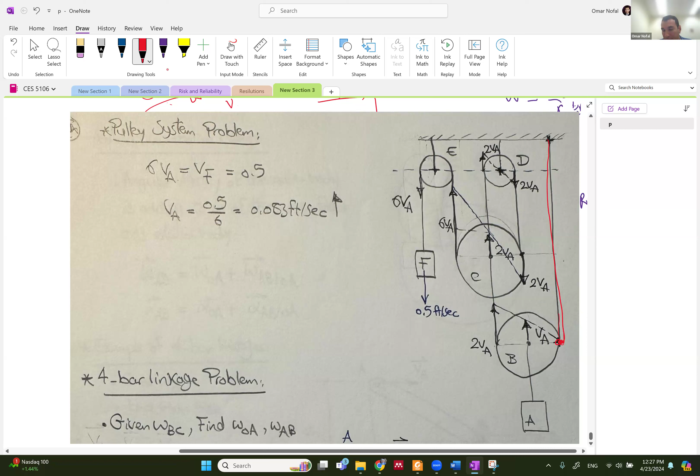It's zero here because it's fixed here. At this instant it's zero. So this is the instantaneous center of this pulley, because this pulley is the same as something moving on the ground. So this is an instantaneous center.

However, this part is not moving and this part is moving, like this one is the moving part. So that's the one that is moving. So this one is not moving right now at this instant.

However, for this pulley, I have this one moving and this one moving. Both of them are moving, but they are related to these two pulleys. These two pulleys are fixed axis rotation here.

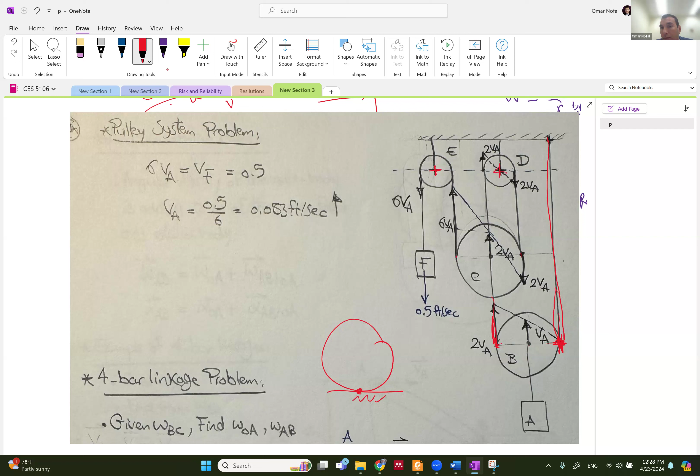Knowing the velocity at the end and the velocity in the middle, I was able to know where the instantaneous center of velocity is, and I can relate that. So can you imagine, with only knowing one velocity, I can know the velocities of all these bodies, how they are moving.

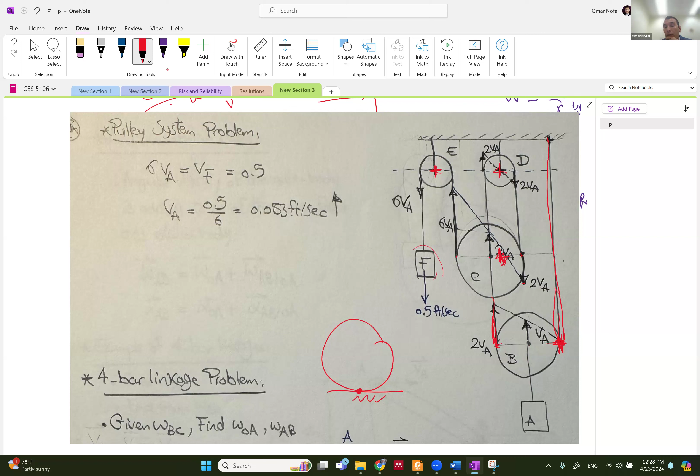I hope that this is not complicated, but I just wanted to show you the different ways for the instantaneous center of the velocity. I hope that this is enough for you guys.